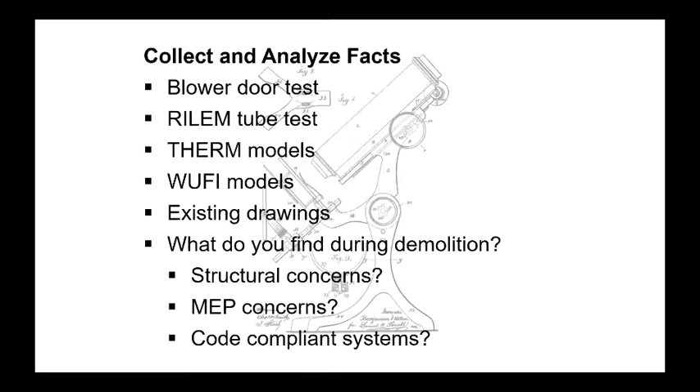So we don't have as much margin for error. We have to pay attention and have everyone on board and not think it's not a big deal. Everything's a big deal.

So you have to establish those goals with your client in order to know where you need your professionals, and using them is really important. So this is a little bit out of what we need to talk about, but there's that testing.

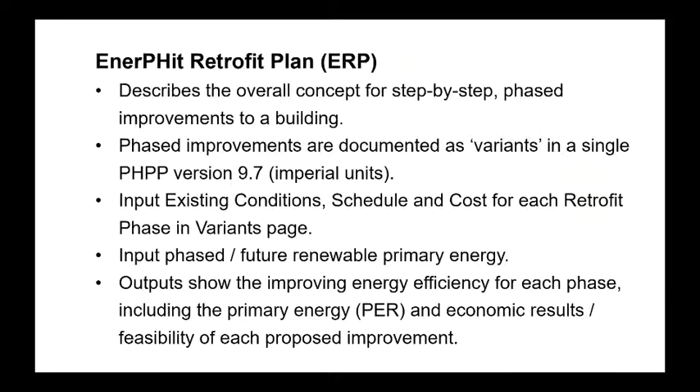And here in my 170-year-old 4-unit apartment building, this is the matrix of the different kinds of walls we're starting with and how we're trying to manage each one of them. Some of them we can gang together because they're similar enough that we can average out and use a similar wall type. But historic renovations and building renovations of older buildings, you might have plaster on that wall in one place and just 2-wythe somewhere else, 3-wythe another, with plaster, without plaster. Some of it's wood frame.

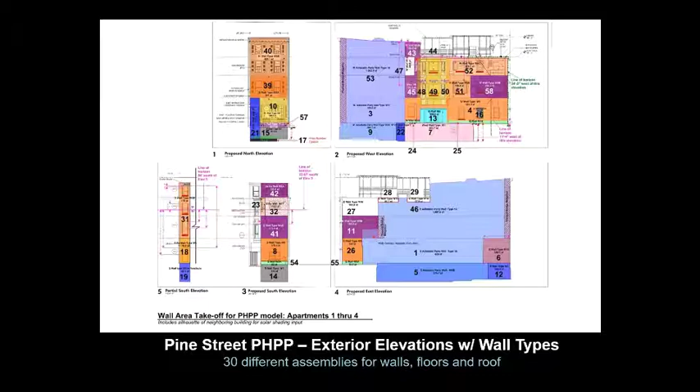It's a whole mishmash of things that you're trying to manage. And there's a lot of building science to deal with, which is different than new construction. So you need to be smart about it, you need to be informed, and you need to think through a lot of interesting transitions between these different wall types. So there you go, that's what I have to offer.

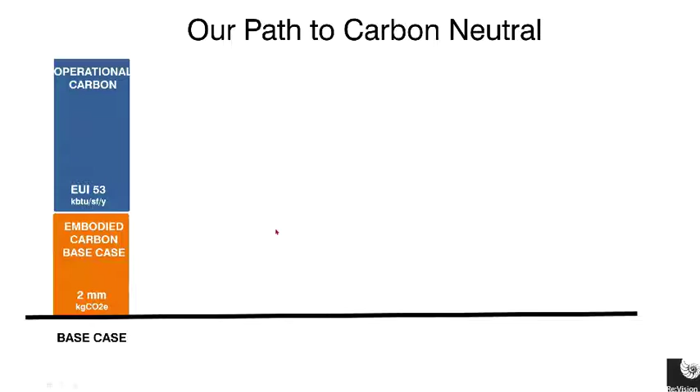So to show you what that might look like, here's a quick example. This is very simple carbon benchmarking. It wasn't sophisticated, there wasn't a lot of fee to do it, but we came up with some benchmarks, and that let them realize that even just using that existing building, they reduced that part—roughly 50% of their carbon footprint—by 50%, taking 25% of the carbon footprint out.

As the project went forward, we looked at the existing design, or the new design renovating that existing building, and found some ways to reduce that carbon by about 50%. That's pretty good—we usually don't hit that number.

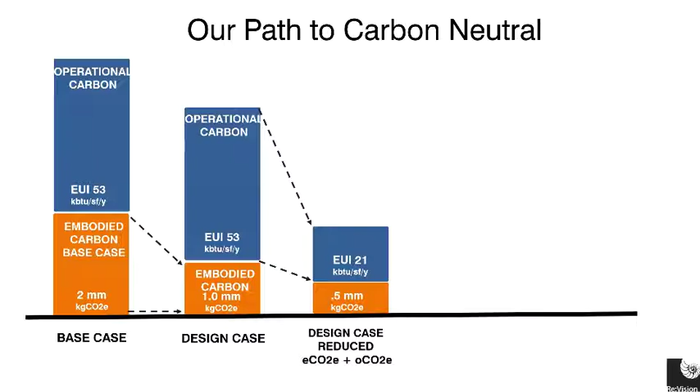Then we were able to walk the design team through a process of looking at their operational carbon. We cut that by about half, 50%. Not bad—probably could have done a little better for this climate, but I was happy with it, because at that point, as a team, we were able to engage and figure out, well, let's put some photovoltaics on the roof. We'd spent enough money on the enclosure already, so now the best investment was really on photovoltaics. And surprise, this one was pretty easy for a 2-story office building.

We were able to make them net zero energy, or predicted to be net zero energy. In fact, we had about a 25% surplus of energy, therefore beginning to reverse that carbon equation. So over time, over a 20-year period, they produce more energy, which offsets their embodied energy. And now we're talking about trying to get them to carbon neutrality or even carbon positive.

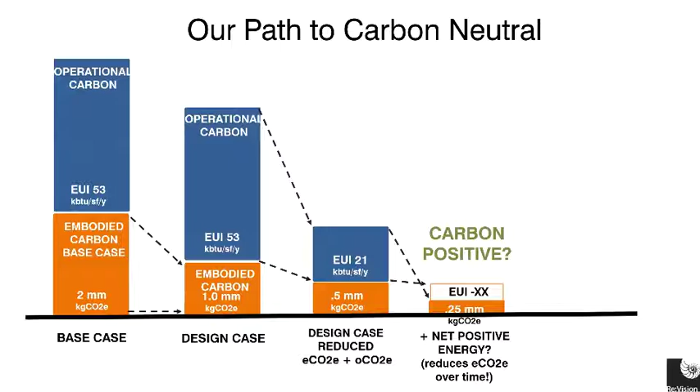Remember, this is a project that with early engagement, which is why I'm using it as a quick case study, we were able to go from LEED certified to carbon positive. So we're not quite there yet. We're still trying to find more ways to sequester carbon on the site and do some handprinting strategies, a little bit of cheating there, which will offset the carbon they have remaining. The point is, really early on, if we're able to have the conversations with the design team and the owner, we're able to have a much better impact.

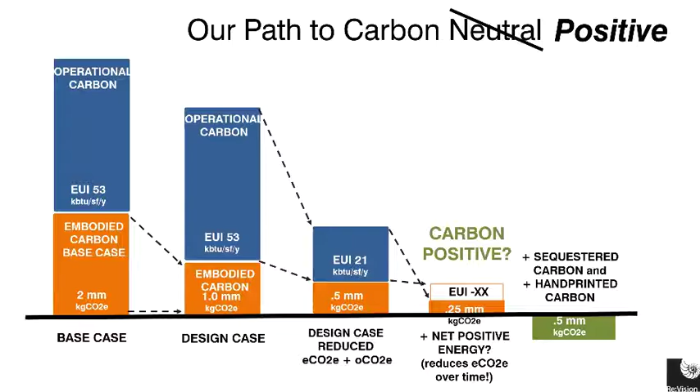Okay, so I'd be remiss if I didn't make one quick point: the time you can involve high performance building design consultants isn't just at the beginning of the project, it's the ongoing operations and maintenance. We've found time and time again, when looking at the full life cycle of high performance, there comes a point where, with the MacLeamy curve, the cost goes down and the impact goes up, and that curve flips. It takes some time, sometimes 5 years out, but it does happen. I just wanted to make that point quickly.

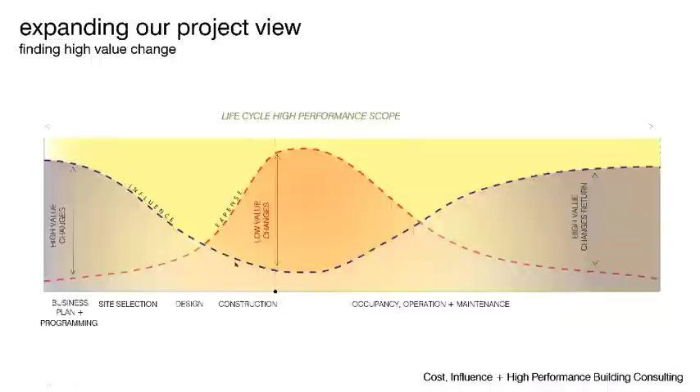Okay, major point 2: keeping building performance specialists well-informed, but not over-informed. We love working with you guys, but when you ask us to come to every meeting, we just become too inefficient. When you ask us to look at every submittal, it's just too much information. So the key here is to work strategically to help us figure out what we need given this specific project and its specific goals, and when it's best for us to plug in.

Okay, so for an example of that: if you give us a schedule and it looks something like this, that's too much information. We need to translate that into something as simple as this.

This is an example from a LEED project of when the high performance building consultant should be involved, whether it's in the original goal setting or visioning, which happens a bit before this, or in the enclosure commissioning, which on a LEED project must happen by the design development phase. I'm going to say that again: for those working on LEED projects, please do not forget that scope of work is supposed to happen in the design development phase, or you break the LEED prerequisite. This is something we see time and time again, design teams forgetting until far too late. So it should be as simple as this to be well-informed and not overly informed.

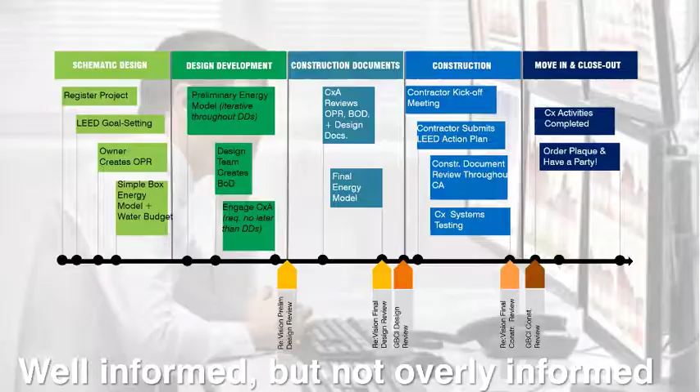Okay, third point. If you think about what we've all learned as architects, we would never let a mechanical engineer go talk to the owner without being in the room, or the owner's rep, or the contractor. We've been taught to play this game of whisper down the lane. And that's a problem when you're trying to get to high performance building. Partially because, to be a high performance consultant, we don't just interact with the architect or the design team—it has to go beyond that. We know this model isn't successful, and quite frankly, it's got to change going forward.

You have to have some faith in us that we are going to work in the best interest of all parties to educate them, share information, and then report back simply and efficiently to the relevant parties. I'll explain this through a principle—and if you've ever heard of it before, I'd be incredibly surprised, because I made it up 10 minutes ago. So I'm going to call it the 3-2-1 principle. Pretty simple.

3/6 of the time, we need to interact with the design team—that's design team, 1/3 of that would be mechanical. 2/6 of the time, we need to interact with the contractor directly, to be an advocate, to show them an easier way to do what they're trying to do, to give them the coaching necessary to be successful—not with the top-down approach, not to yell at them about what's in the specs, but to be their friend and help them through the process. And 1/6 of the time, we need to interact directly with the owner, help them set policies, set their agenda, make sure money is allocated correctly so the entire team can be successful.

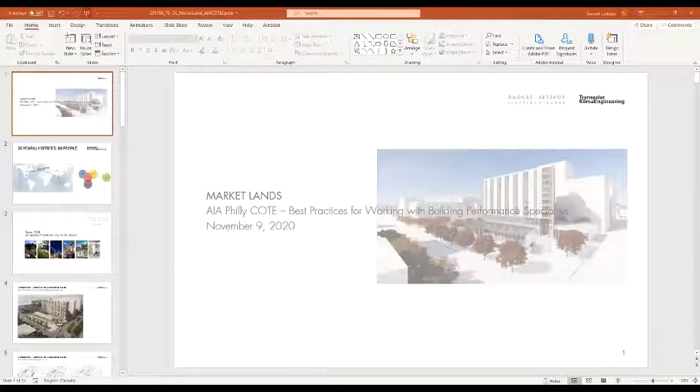Everyone, I'm just going to figure out how to share my screen. Okay. Great. Can everyone see that? Yes. Okay, great.

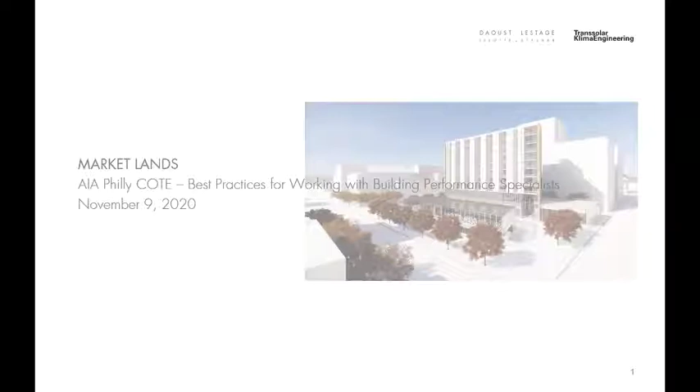At Daoust Lestage, for the last 30 years, we've really focused on a multidisciplinary approach to architecture. So we say that our approach is based on intertwining disciplines from the city to the object. In our office, which is only about 20 people, we have architects, urban designers, landscape architects, industrial designers, and we really practice a holistic approach to projects in general and sustainability as well.

The project that both Tommaso and I have been working on since, I guess, the fall of 2018 was initially a competition for a project called the Market Lands, which is under development in Winnipeg, Canada, in Winnipeg, Manitoba. We teamed up from the day the RFQ was released. So from really the first expression of interest on the project, we sat down with Tommaso and his team and brainstormed what could make, what are the key elements of this project which could be interesting and could really attract them to our team.

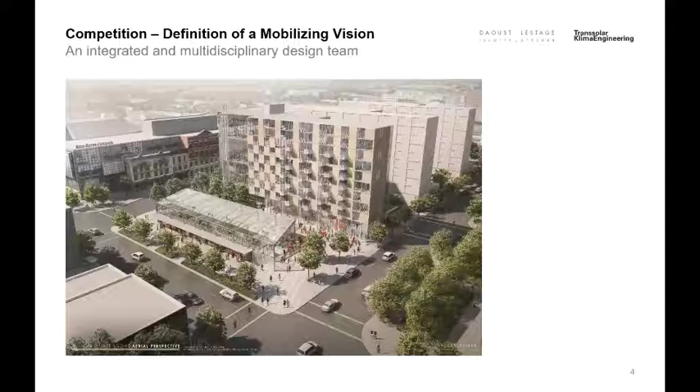Transsolar had previously had some work in Winnipeg, and for those of you less familiar with Winnipeg, they have extreme swings of temperature from plus 40 in the summer to minus 40 Celsius in the winter. But they also have Canada's highest level of solar radiation. For a city that's relatively small, they have a lot of very high performance buildings and high levels of sustainability.

So when the competition was released, actually the RFP stage that we moved forwards towards, we teamed up with other consultants and really started diving into the project. One of the reasons we really like working with Transsolar is that the importance of a mobilizing vision is really key to the success of any project. So from early on, we worked with Tommaso and the rest of the team to really highlight what were the key elements of the site.

They had existing, very brutalist buildings, but that also had existing elements in the basement that we thought we could potentially reuse. They had a really interesting urban fabric that sort of collided or created a geometry of interaction on the site.

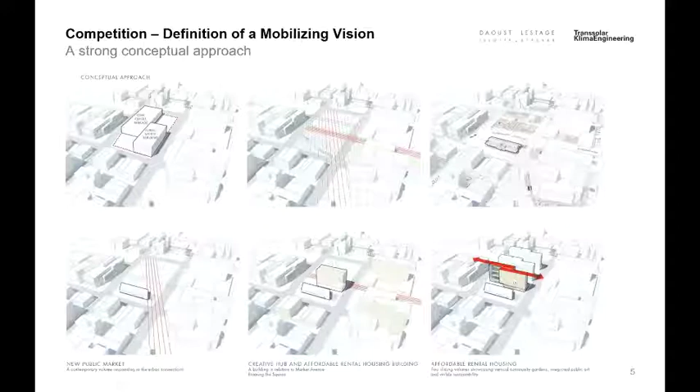There was a heritage market space, and all of that combined with these ideas of the temperature with large seasonal fluctuation and the high levels of solar radiation pushed us to propose a building that was really pulled apart, so that you could have both the building and the sustainability strategies visible on the facade.

This, as part of this mobilizing vision, really created this idea of social sustainability, so that our approach was not just about being a net zero building, but also having that net zero be integral to the overall design approach and aspirations of the building.

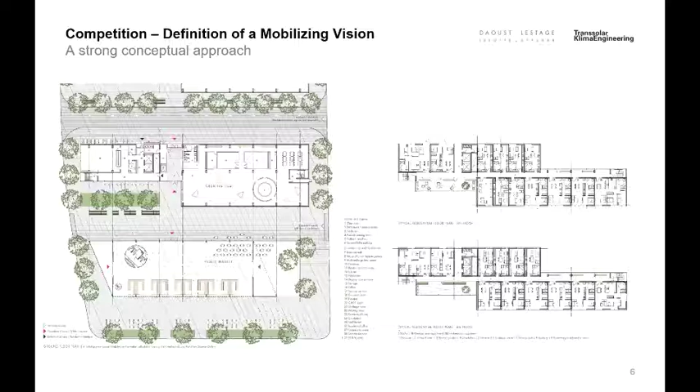So at the time we had winter gardens, which preheated the air. We had a south-facing building where we were maximizing the heat gain, as well as reusing the existing basement structure to hold water as seasonal storage.

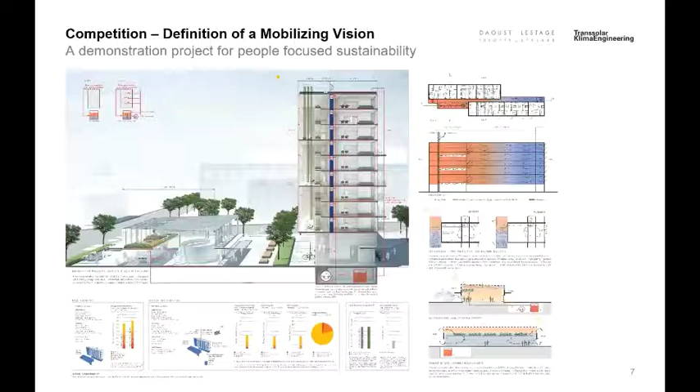This was one of the boards that we submitted as part of the competition entry. What you'll see as Tommaso and I walk through some of this development is that because of this early involvement in defining the vision for the project, this image never really changed. Pieces got moved around and reshuffled, but the initial ideas to date still remain as part of what the team is working on.

Yeah, and this was our faces at the very beginning of the competition when we have ideas and we are super excited. And if we move to the next one, this goes also to what Scott was discussing about, how do we communicate in between the team.

I could go on for hours talking about the climate, but at the end of the day, Rachel said, whatever is important for the design. So this is a chart which says Winnipeg has a lot of solar radiation, especially to the southern facades.

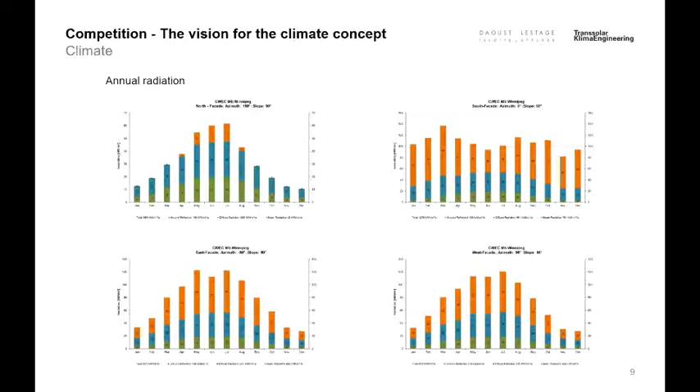And then if we move to the next, this was exactly the wow moment when we said, haha, then we need winter gardens. Now, saying we need winter gardens to collect sun has a big design implication. If you don't do it in competition phase, where you create the space and the volume for the winter garden, then it's very complicated to introduce it back into the project. So that was the first idea we had: we need to collect sun in the facade, and we do it with the winter garden.

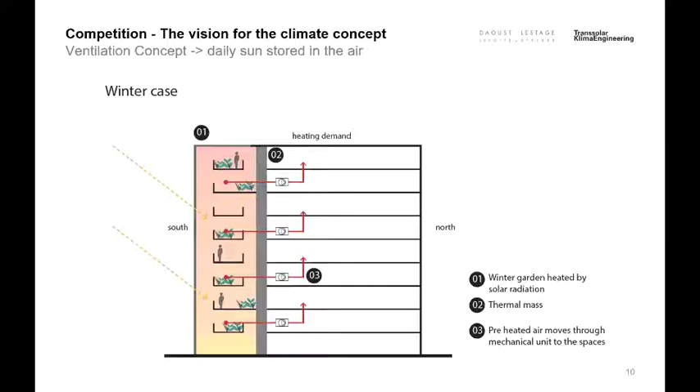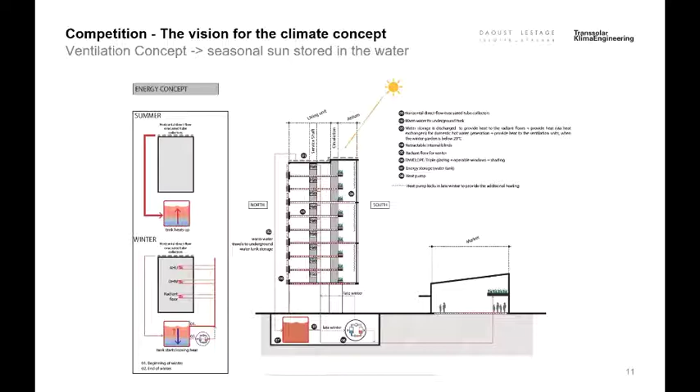And then if you move to the next slide, we said we have an existing underground space which is unused. We can basically reuse it and store the energy, this time from summer to winter with the water storage, because Winnipeg is very cold in winter, but we have lots of sun, especially in summer. So we want to transition this energy with the seasonal water storage from one side to another, and we want to reuse the space because then it's going to be cost effective. So that was, again, the hypothesis, which had a big design impact since the beginning.

And if we move to the next, then the project starts and our faces change a bit, because that's the way it is, right? Then we start putting together the numbers and we start developing the narrative, talking with the client, because the most critical piece of competition is that you don't really talk with the client. So you have an RFP, you have a vision, you follow it, but you don't have the conversation with the client that then changes again the project the moment you start. And this is the moment of the development of the project.

I think that's one of the key elements which is a challenge: even though the architects and the building performance specialists on this project were working together from the very beginning, and in a lot of ways that's made the project very much a success, this notion of not being able to really be involved in questioning the client and asking questions and having them push back or advise on where they're going did lead to definitely some changes before we were even awarded the competition moving forwards.

And so basically within days of our bright idea and lots of excitement, we went from the idea of these sliding volumes that pull apart with our large winter gardens to a building that responded to their need for something to be much more conventional and saving on square footage.

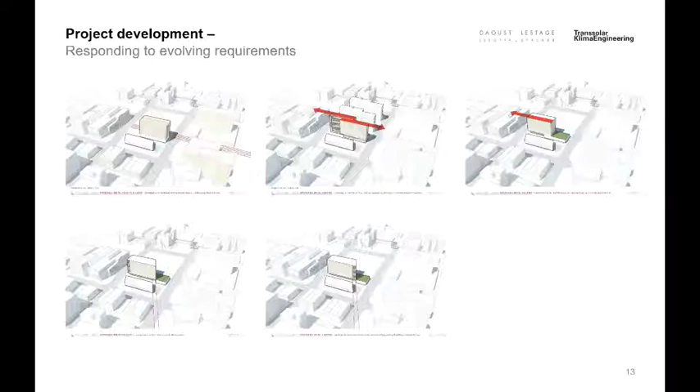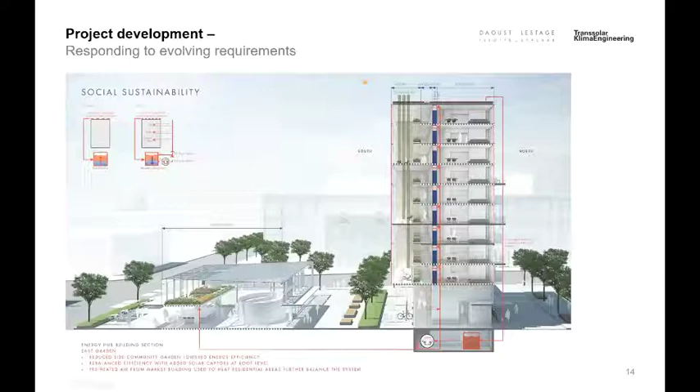We did manage to maintain the idea of the winter gardens, as Tommaso said - a real reason, or really a benefit, of early involvement is making sure that even if these items get reduced, they still stay a critical role in the project. And so as we moved forwards, we were able to stick with this same idea of the demonstration project and social sustainability by reshuffling some of the ingredients, as Scott said earlier.

Unfortunately, this did mean reducing to a more consolidated footprint. And eventually, through the first stage of cost estimation where the client brought on board a construction manager, that meant what had been 3-story but smaller winter gardens moved into being community spaces or units within the building.

So I think that was really the main hurdle number one, is this notion of, in a project that is still set up with a very traditional structure but has very high aspirations, how do you challenge the notion of traditional standards like Class D estimate square foot costing when you have really innovative technologies or approaches? So how do you balance that cost versus quality equation, and how do you challenge people's imagination?

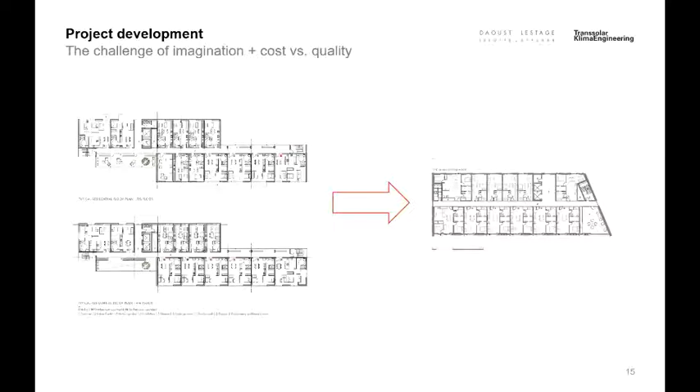So the idea of this 3-story space, which to a contractor can look like it's a waste of space and they don't really understand, how can you still try to maintain some of that initial design intent moving forward?

Yeah, and now you understand why I used that emoticon, which was a bit like troubled, because the moment you change the idea of the winter garden, for many reasons, the ventilation concept of the entire building was relying on it. We collect the sun from the facade into the winter garden, then we draw air from the winter garden into the apartments. The moment the winter garden is gone, we have to rethink everything.

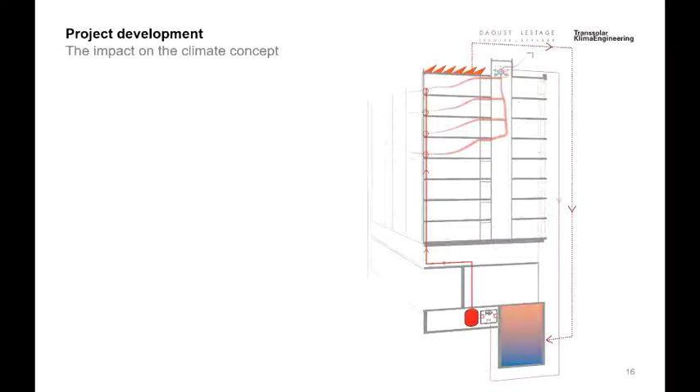And then the other challenge was the water storage. We kept it in, even if we built it on site now, because the city didn't really allow us to reuse the underground space from before. So we had to build a water storage. To make it cost effective, we found a technology which is basically a prefabricated stainless steel tank, which we dug into the ground. So that was the water storage, which was collecting the solar energy captured from the roof.

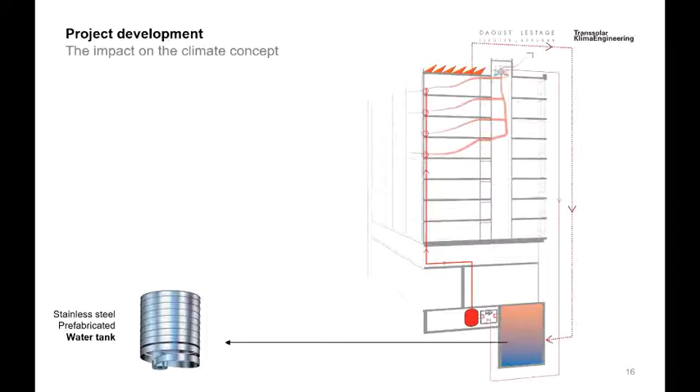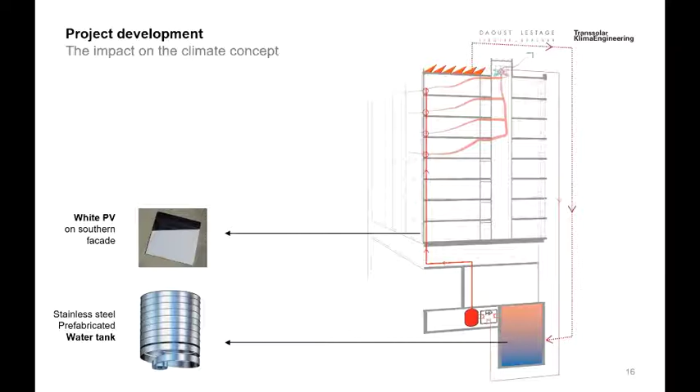So even there we found a challenge, which was the market. At the beginning, we wanted to have solar thermal panels on the facade, which the market was not ready for. Then we replaced the facade with PV panels to produce electricity, and the market was ready. And we shifted to solar thermal panels on the roof, collecting solar energy, bringing it into the water storage, and then this heat was transferred again to the facade, where operable windows were doing natural ventilation, preheated, because we had a heating element in the facade.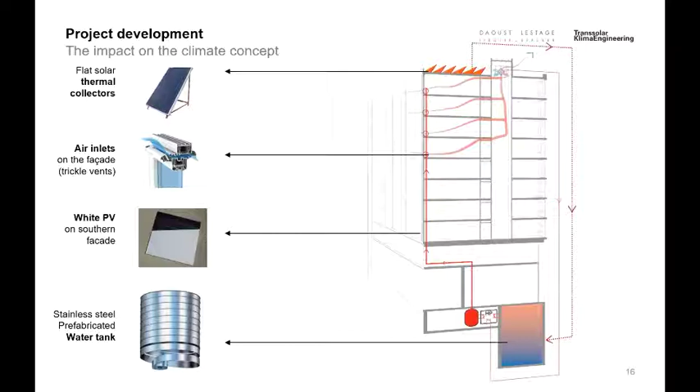So, long story short, even if the project changed, since on one hand the team was aware of the logic since the competition, and on the other hand the client also was following the process and was very able to reshuffle around the pieces and keep the vision there.

This was also a very strategic move to go with this system, which is a kind of fan coil without a fan. We call it a gravity wall, which is in the facade. The air goes through this cavity, gets preheated, and then is supplied into the apartment. And again, the point of mentioning it is because this requires an integrated design process, because all the pieces start being connected to one another.

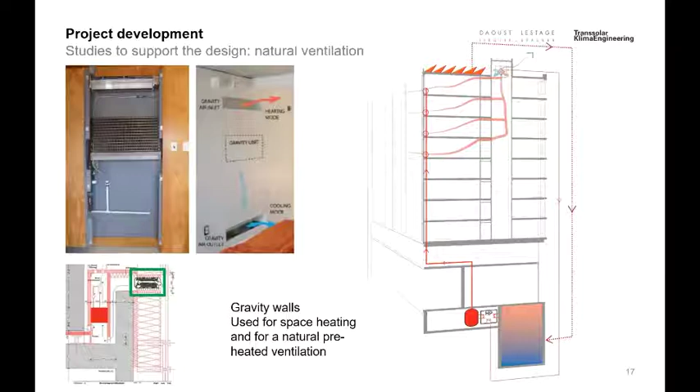Yeah, and then this was another piece of the design, which was very important. We translated it in a very simple way. I hope, maybe Rachel, you can confirm if it was simple or not, but if you keep scrolling in this slide, then you see that there are some pieces at the end of our calculations, which were months-long calculations. We translated this into square feet of openings, square feet of transfer elements, square feet of plenum, and square feet of chimneys—4 numbers, which are a result of 2-3 months of simulation. But at the end, this is what the architect needs.

And this is what we delivered to make it actually happen. And also the mechanical engineer, of course, because the mechanical engineer needs to integrate everything with one another.

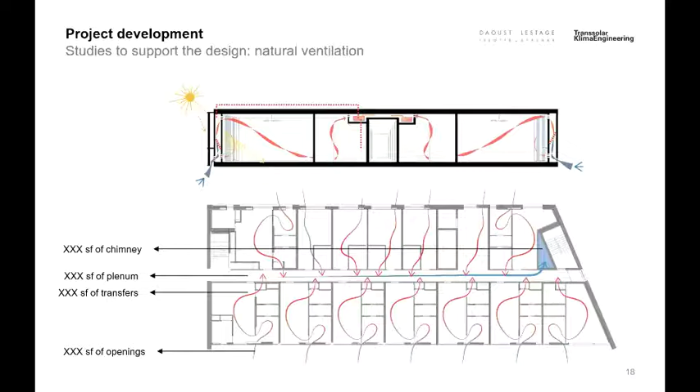And then the last big piece of integrated design was, of course, the facade. We wanted to go with fixed exterior shading. We had a southern facade, which was very easy to control with fixed shading. But of course, we had to give some rules of thumb, which you see on the left: the wing walls that you need, the distance in between the wing walls, and the depth of the overhang. Those are the artifacts. Then you need to transform it into design.

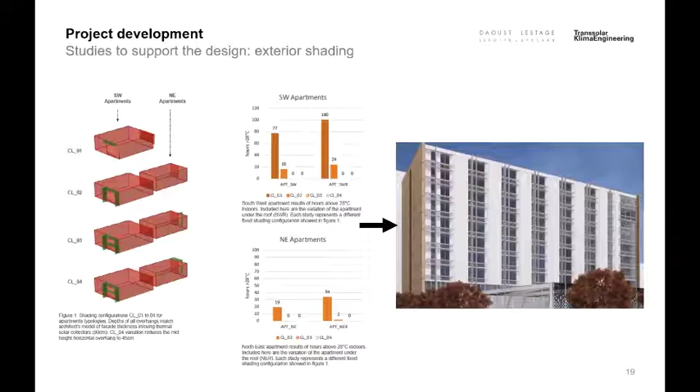And then we ended up with this very beautiful integrated design of the facade with performance, which is what we actually want.

As Tommaso just explained in more detail, what remains successful to date is this notion of having an integrated approach to the building, where you can't separate the net zero approach from the building, or the building from the net zero approach. So one of the benefits, from our standpoint, is that when elements are brought up to be removed or value engineered, it's actually very hard to separate these pieces. We can reshuffle them, but to actually step back from the net zero approach is a fundamental change to the building itself. At least 50% of this building will be affordable rental housing.

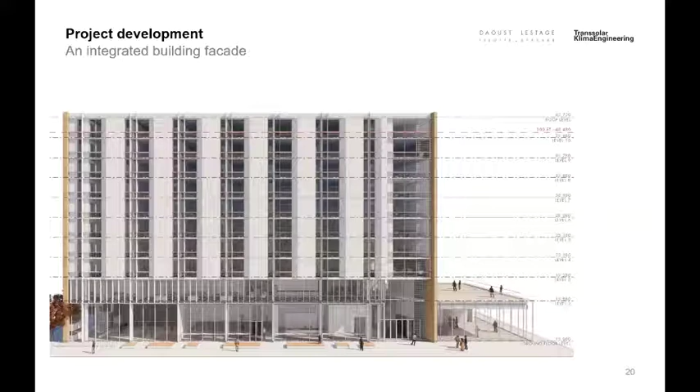And the integrated approach and the narrative of this is something that we found does help us to discuss with the client as the client group evolves, so that they understand the logic and the narrative of what's trying to be achieved.

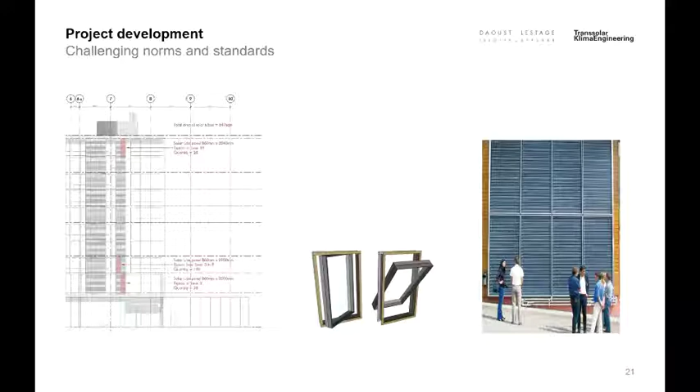In moving through that integrated approach, as Tommaso said, there have been different iterations where we had solar thermal on the facade, but that created issues of not being available within the market. We have run into issues with needing to have the opening area in the windows while still remaining safe for small children living in the building. But despite all of those hurdles, we are sticking still with the overarching vision for the project.

One of the key elements is really how together, I think, architects and building performance specialists can find ways to convince clients and end users of the value of what we're trying to do, and how we need to change the way we look at buildings and look at our environments.

And so even just this afternoon, we had a whole discussion about what's too warm, what does temperature actually mean, how is human comfort a part of the experience of the building.

Luckily in Winnipeg, there is a college just across the street from the site that has a large building efficiency lab we're in discussions with to do one-to-one mock-ups of the gravity wall and trickle vent and the different elements of the facade, so we can work with them and their students to test the possibilities, ensure we're refining the design as we move forwards, and hopefully convince some of the skeptics that this is actually a building that will be comfortable with natural ventilation when it's 90 degrees outside.

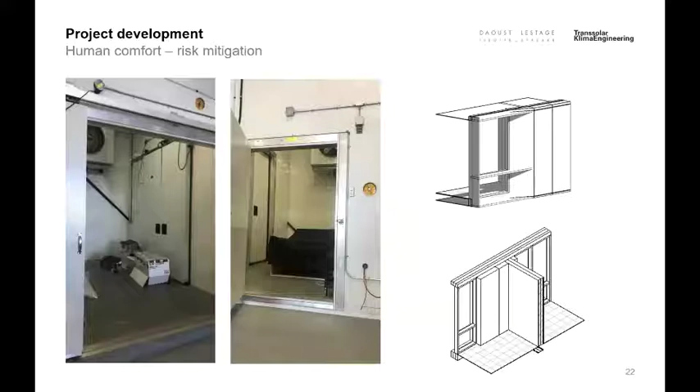And so to date, after all this time, we still remain with really what is the kind of initial diagram of the building. As Tommaso said, essentially we reversed the arrows, but have maintained a lot of the initial elements that were there, thanks to the early involvement and really integrated approach to developing the design of the building.

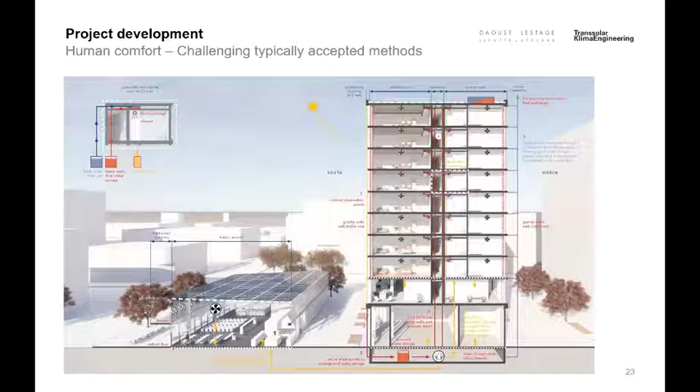So I don't know, Tommaso, on our to-be-continued, the saga of our project goes on. It's going to be a success.

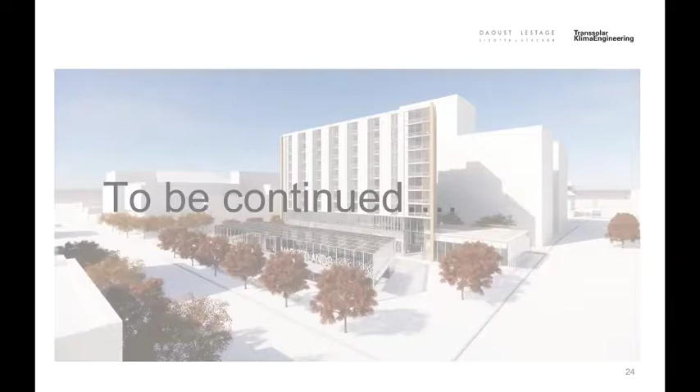As every project, there are loops with the clients, with the design team, and I think this is normal. The integrated design is not linear; it's a spiral process which goes up and down. And even the risk mitigation - I have been asked many times to do innovation without risk, and this is a contradiction in terms. Innovation has risks. The point is that you need to mitigate risks in a way that you can be innovative and then make it happen in a cost-effective way, and again, bring innovation into the building industry.

So that is what is going to happen in the next year, probably, Rachel, again. It will, it will.